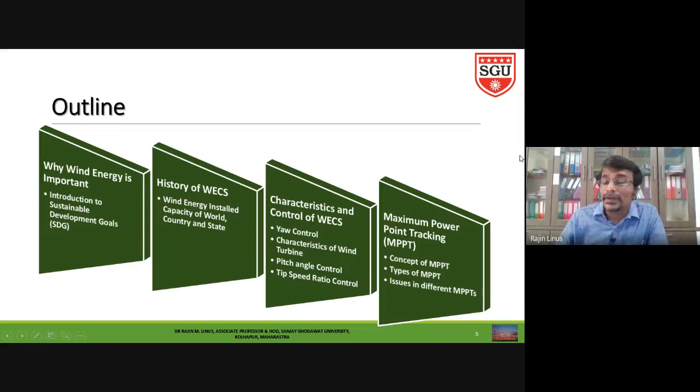So what is the concept of maximum power point tracking? If you are not doing this maximum power point tracking, what is the problem? Why do we need to go for it, and the types of maximum power point tracking and issues in different MPPTs — this is the outline of today's seminar.

So first let me see why we need to go for wind energy, and why it is important. As per the United Nations General Assembly in the year 2015, they fixed 17 agendas to improve our 17 sustainable development goals, in order to improve our world to the next higher stage, with a target of 2030 to achieve them.

I don't want to cover all the development goals, but the 7th goal of sustainable development is to ensure access to affordable, reliable, sustainable and modern clean energy, and increase renewable energy in the global share market. Nowadays we usually use diesel engines and fossil fuels for generating power. By 2030, people are targeting to increase renewable energy in the global energy share market.

Then, access to affordable and reliable energy by 2030 — some people are still not getting electricity nowadays.

So we need to give some rural areas electricity. Then another target should be efficient energy, where the energy should be efficient and clean. Clean in the sense, we are concentrating on wind and solar energy, two of the renewable energy sources.

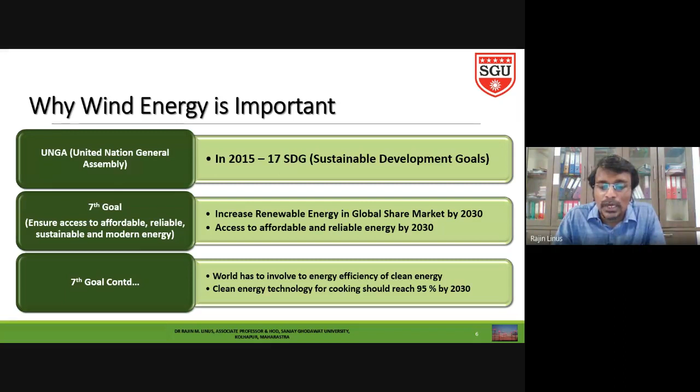So due to that, all the researchers are stepping towards implementing this, improving the efficiency of wind energy conversion systems, solar systems, and even electrical vehicles are part of these things. So based on that, more industries are thinking. As an electrical engineer or energy engineer, we can see there is some scope. So we should know what are all the development goals. That is why I have shown this for you.

Then, motivation towards renewable energy - we know why we need to go for renewable energy, right? So in 12th standard, we have studied ozone layer depletion. That is why heat energy is generated. You know this already, I am just revising it for better understanding of the forthcoming slides.

So we know the sun radiates energy. In that radiated energy, there are harmful UV rays, more harmful UV rays. If it comes directly to earth, what will happen? Skin diseases and other illnesses will happen to people - it is not good for health. So it is higher temperature, harmful UV rays. That is why, by God's grace, there is an ozone layer. Nature has given us this ozone layer for prevention, and the remaining filtered energy is given to our earth. So this is the normal case.

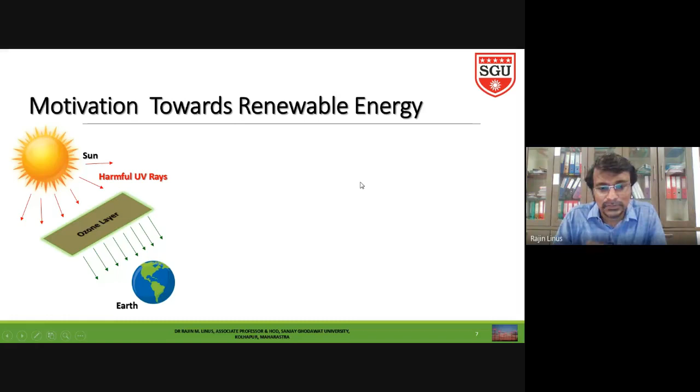So sun, ozone layer, and earth. Now the main reason for depletion is - we know chlorofluorocarbon.

Some electrical applications are generating chlorofluorocarbon. It will generate depletion or holes in the ozone layer. Then volcanic eruptions in some hills having metallic content will generate fire - this volcanic eruption also causes ozone depletion. This is natural, but as people change and technology improves, we are changing everything in the environment. That is why nature is against us.

Then the third one is higher pollution from vehicles and industries. This is another motto behind this. These are the main reasons for the depletions in our ozone layer.

So what are the effects of ozone layer depletion? I already told you, UV rays health problems will affect our health. Then life cycles of some species get affected, so we can see some species becoming rare - we cannot see them nowadays. The main reason is due to holes in the ozone layer, more UV rays are coming, causing this.

Then plants can get affected too. Then the last one is it leads to global warming.

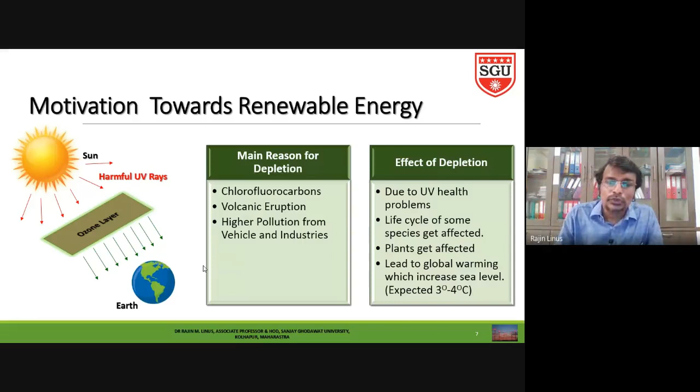So you should know this. Anyway, you already know this I think, just so you should know.

Then, world cumulative installed capacity of wind turbines. Coming 2023, people are expecting 903 gigawatts as the total world installation capacity in the form of wind. Our current status in 2019-20, installed capacity was 656, where 65 new turbines have been installed further.

So likewise, previous histories are not available. From 2015: 64, 55, 53 - there is a blue color small box showing new installation in gigawatts. So you can see this much installation capacity has increased.

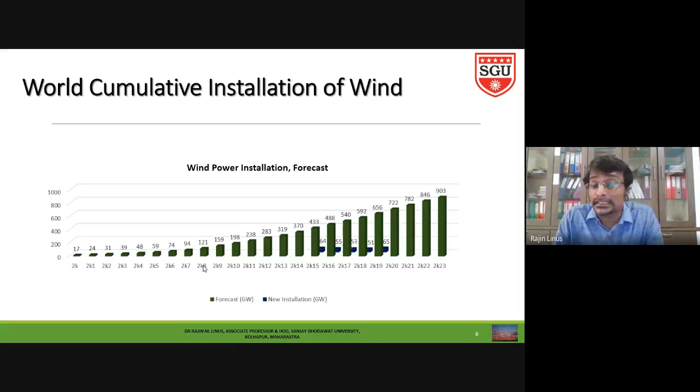Therefore, surely electrical engineers also have a good scope in this area.

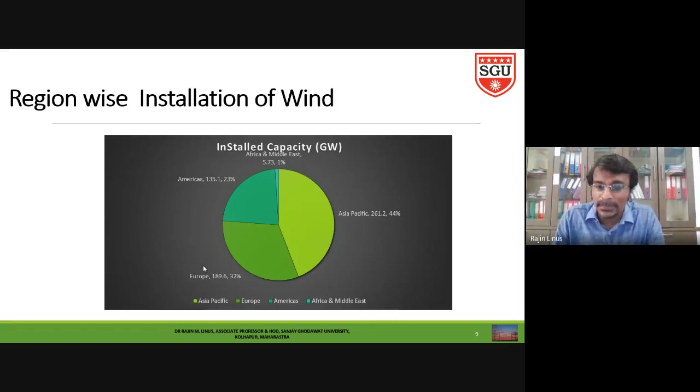Region wise, Asia Pacific has total installed capacity of 261 gigawatts, which is 44 percentage of whole installed capacity in this region. Second is Europe, 189 gigawatts, 32 percentage. America, 135 gigawatts, 23 percentage. Africa and Middle East have less, 5.73 gigawatts and 1%. So this is the region wise installed capacity of wind.

Then country wise, we should know China is first, with 211.3 gigawatts, 36% of entire installed capacity. Next is United States, 96 gigawatts, 16%. Then Germany, then India with 35 gigawatts and 6%. Likewise, Italy and rest of the world have 91.79 gigawatts, 15% installed capacity of wind. So this is the country wise data.

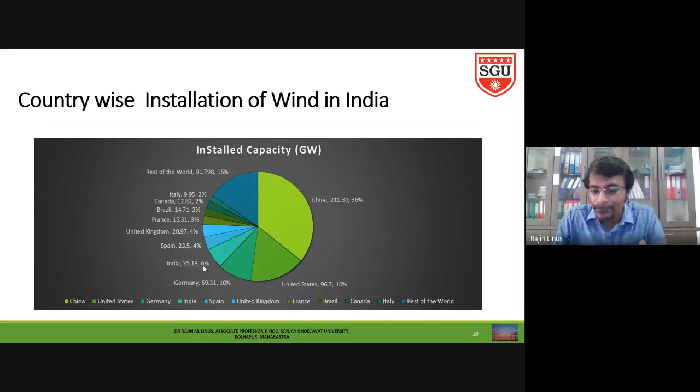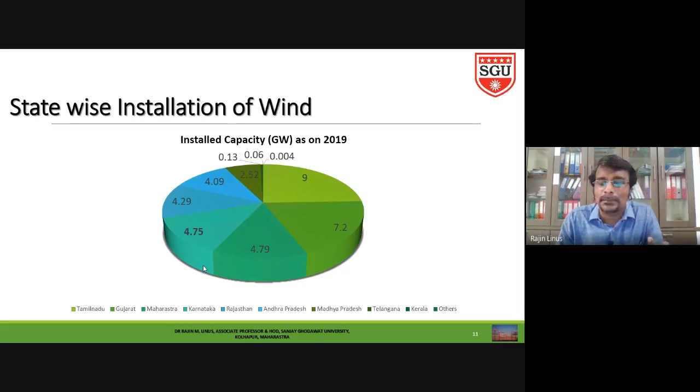We know that due to changes in the wind, the places are different, and due to that, wind flow is different. I have not included that topic here, as I need to concentrate more on maximum power point tracking. I included it in the previous webinar, so I hope you know how the wind flows. Based on that, the installed capacity everything changes region wise. One should know this entire thing to understand how, as electrical engineers, we have scope. This is one of the scopes. Like that, we can think about solar, electrical vehicles and other things.

Then types of control. I am directly entering into the topic of types of control, and I will go to maximum power point tracking. So kindly listen very carefully. It is very interesting, and if you listen, it is very easy to understand.

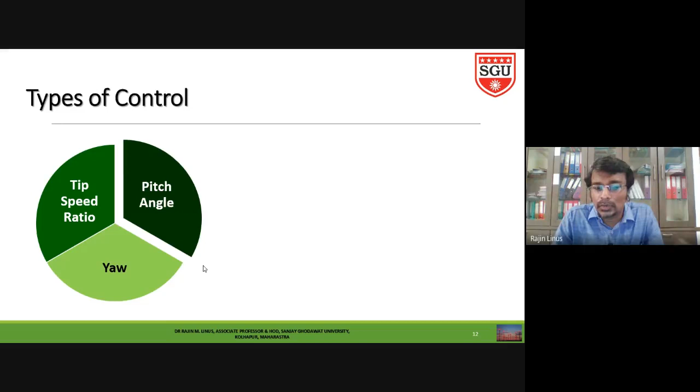So we have three types of control: yaw control, pitch angle control, and tip speed ratio control. First you should know yaw control. What is meant by yaw control? In this yaw control, the electrical engineer will not do much.

Yaw control means, like our pedestal fan, if we want the air in a particular direction, we turn the head of the pedestal fan. Like that, wherever the wind direction is, accordingly we change the head of the wind turbine. The wind has to attack directly and perpendicular to the wind blade. Then only the wind turbine will start to rotate. So based on the wind direction, usually we have two types of wind turbine: horizontal axis and vertical axis wind turbine.

I am not going to explain anything about vertical axis wind turbine. This is the wind turbine normally which you can see in Tamil Nadu state, like in Pollachi and Aralvaimozhi — that is horizontal axis wind turbine. So based on the wind direction, there is a wind vane and an anemometer. Based on the wind direction, we change the wind turbine head automatically. That is called yaw control.

Electrical engineers can't do much with that directly, but maybe we can think differently. I cannot say electrical engineers cannot do it — in this yaw control, there are servo motors for controlling and changing the direction of the head, so one can think of it. Then pitch angle control: based on wind power, power production and wind speed, I will let you know how pitch angle control is done. Then finally, tip speed ratio control — most of the MPPT I am explaining is in tip speed ratio control only.

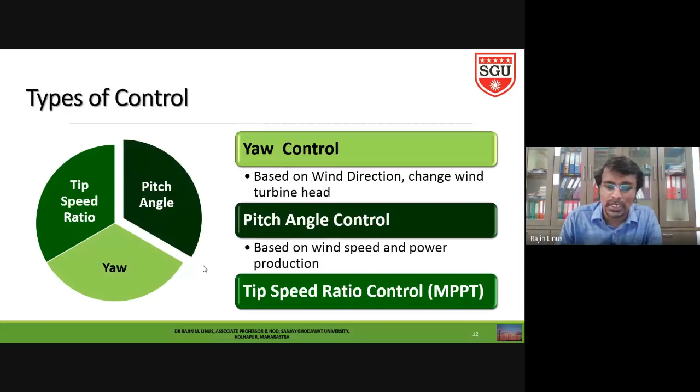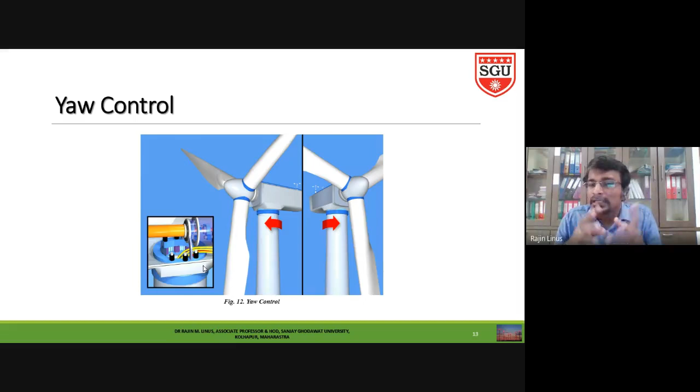Now for yaw control, see the direction of the turbine — left to right, shown by the red arrow. So the head can be controlled on both sides. We can see there a small toy-like device, which is the wind vane and anemometer, giving the direction of wind flow. Accordingly, in the shaft below the head, you can see one blue ring, and inside that we can see a servo motor. This servo motor works because the anemometer provides instruction to the controller, so the servo motor starts to rotate automatically, and the head will change.

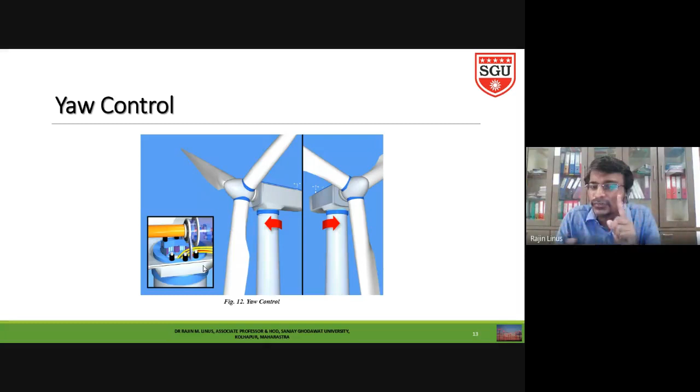So this is called yaw control. Then we should know pitch angle control. Pitch angle control is nothing but each blade can be rotatable. Each blade can be rotatable.

So why we need to go for pitch angle control? Please listen very carefully, it is important. Pitch angle control direction, each blade can be changed. Why we need to change each blade? That is very important, so I will let you know.

If you take one photo, front view of wind turbine, normally it will be like a flat, the blades are flat, wings are very flat. Assume that your direction of seeing the monitor, where you are now listening the webinar, is the direction of wind flow. Your eye direction is your direction of wind flow. Then the wind is directly opposing, it is a plane. So what will happen? All the wind will hit there. Due to that, what happened? This wind turbine will start to rotate. So this position is called pitch angle 0 degree.

So we cannot change, now all the wind is flowing. Wind is hitting this blade so that it is rotating. It seems to be like a plate, normal plane. So that is called pitch angle, pitch angle 0 degree. Now see this wind turbine position, it is tilted, it seems to be like one paper. Your monitor, you are directly seeing that is the wind flow direction, and you are looking at the monitor, that is a plane. That is called pitch angle 0.

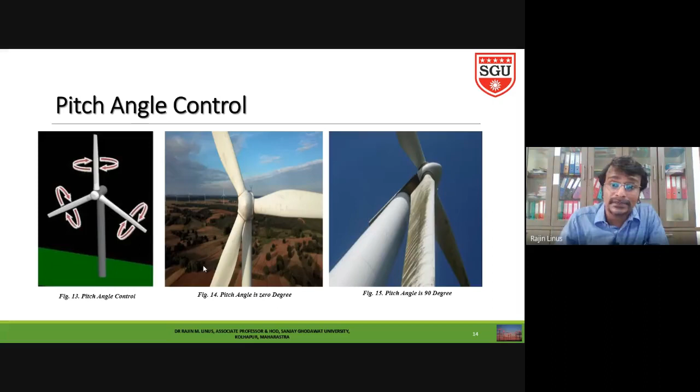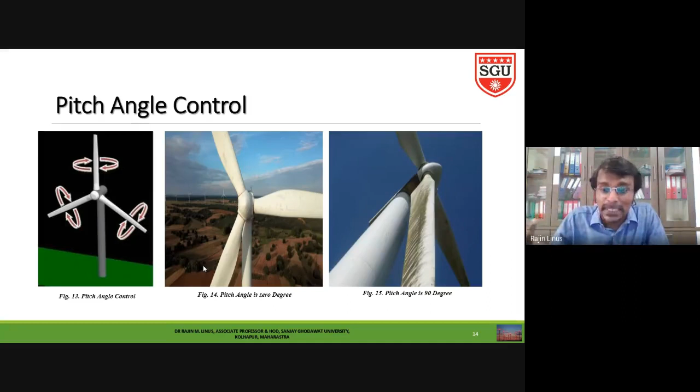So again, V cut-in speed is 2 to 3.5 meters per second, V rated speed is 12 to 13 meters per second, and V cutout speed is 25 meters per second. Beyond 25 meters per second, the wind turbine has to halt, otherwise the 3 blades will be damaged and we cannot run the wind turbine. That is called pitch angle.

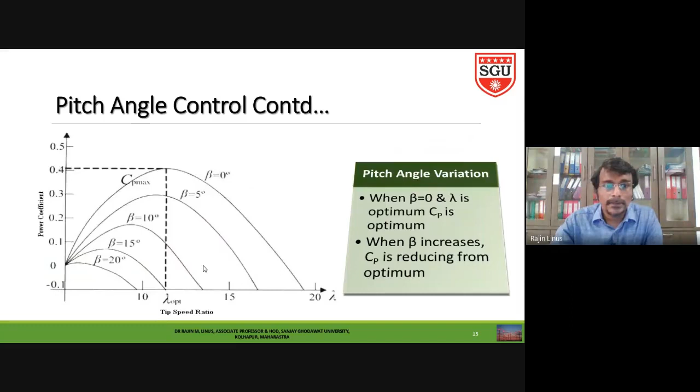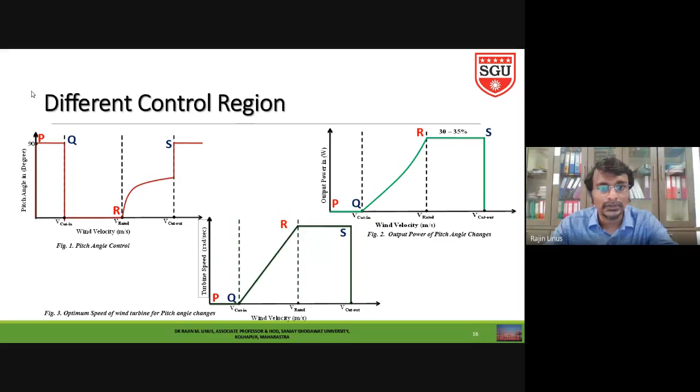Okay, moving to the next slide. In the last session, I told you about the different regions. Please try to understand maximum power point tracking. I am not going to explain the pitch angle control region now. MPPT I am only going to explain in the region Q to R, meaning between V cut-in speed and V rated speed. Don't confuse this with the region between P to Q and R to S and above that, only the region Q to R. We can see when wind velocity increases, output power increases, and turbine speed also increases. How this happens is what I am going to explain through maximum power point tracking. So once again, only cut-in speed to rated speed.

For the cut-in speed to rated speed region, the characteristics of the wind turbine look like this: generator or turbine speed on the x-axis, output power on the y-axis. For a particular wind velocity V1, the turbine characteristic looks like a hill. If wind velocity V2 increases, the power curve increases, the hill shape grows. Then V3, the hill shape increases again. Then V4, and so on. This wind velocity range V1 to V4 varies between V cut-in and V rated, not between 0 and V cut-in, or above V rated. This is the wind turbine characteristics.

I need to go into a bit of mathematics, otherwise it is very difficult to explain. The power characteristics of a wind turbine depend on parameters: air density, swept area A, and CP, the power coefficient. CP is a function of lambda and beta. Lambda is the tip speed ratio, beta is the pitch angle. Then wind velocity cubed. To repeat, power production from the wind turbine is half times rho, where rho is the air density, A is the swept area, which is a circle, pi r squared. Cp is a function of lambda and beta, I am not explaining more derivation about that, just understand Cp is a function of lambda and beta, then V cubed. Usually air density is normally 1.2 kilograms per meter cubed.

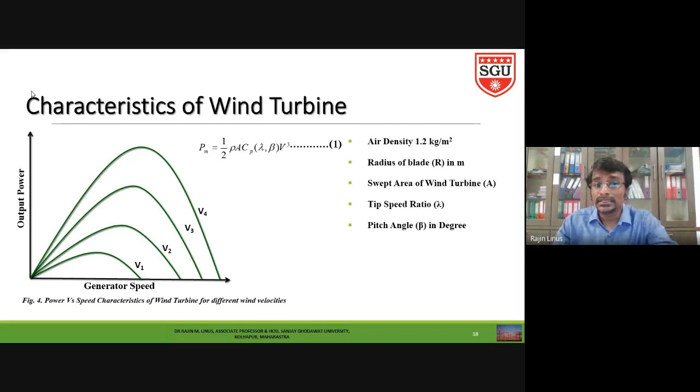Then power is dependent on the wind velocity. It is not in our control. As the wind velocity changes, our power will be changed. It is not our control. So power control is only the variation of Cp of lambda comma beta.

I have told you Cp is the function of lambda comma beta. We are assuming that MPPT operates between V cut-in to V rated. So what is the pitch angle between V cut-in to V rated? Pitch angle will be 0. So if that is the case, Cp is only the function of lambda, since beta is already fixed as optimum 0.

So Cp is only a function of lambda. What is lambda? Tip speed ratio. It is equal to speed into radius divided by wind velocity. So here, if the wind velocity is constant, the radius is also always constant. So lambda is directly proportional to generator speed.

So please understand, with this relation, beta is already 0, pitch angle 0, so Cp is only a function of lambda now. How will we change lambda? Only by changing the generator speed. So once the generator speed is optimum, automatically lambda will be optimum. If lambda is optimum, automatically Cp will be optimum. So this is the way of doing this.

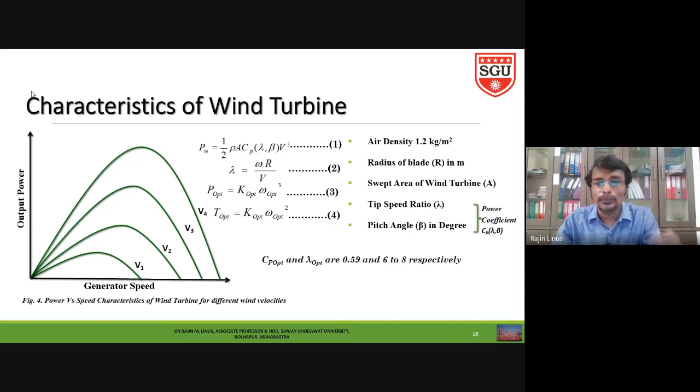So I hope you understood, this is interesting. This is the case. Now let's introduce these things, assume a little bit.

X-axis generator speed, why do we need to go for MPPT? Assume x-axis is generator speed, y-axis is output power. So now assume we are not at all using MPPT. What will happen? At any speed, assume the power speed is omega A, it will run at one particular speed. So at this speed, maybe omega A or omega B, we don't know which speed it will rotate. When its speed is like this, in this curve for a particular wind velocity, we will get this PA or PB.

If you are not using MPPT properly, we don't know where the generator speed will be. Based on the wind velocity, the generator speed will go somewhere, automatically to omega A, giving power PA. But for omega B, PB, we don't know where it is. I have just chosen these 2 points as examples.

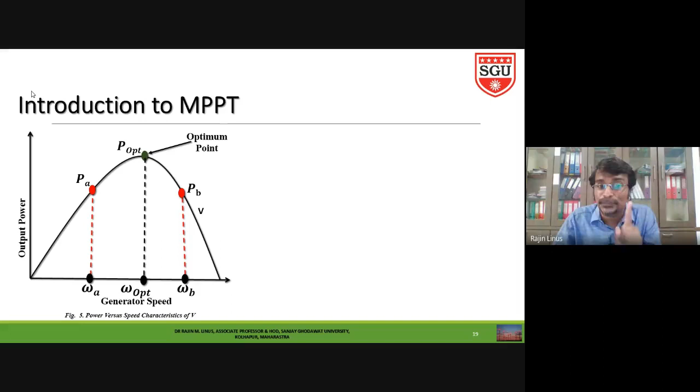But in our case, we have an exact maximum optimum point in the middle, the top of the hill. That is called omega optimum. Usually, when people install a wind turbine, it is designed to last 25 years, so owners try to recover their money before that. So instead of letting the generator run at some random speed, if we run it at the maximum optimum point speed, we extract more power, and over the entire 25-year period we get maximum energy.

Otherwise, our power will be there, but energy will not be there. Do you know what energy is? It is the integration of power with respect to time. So one should control the wind turbine at the optimum speed.

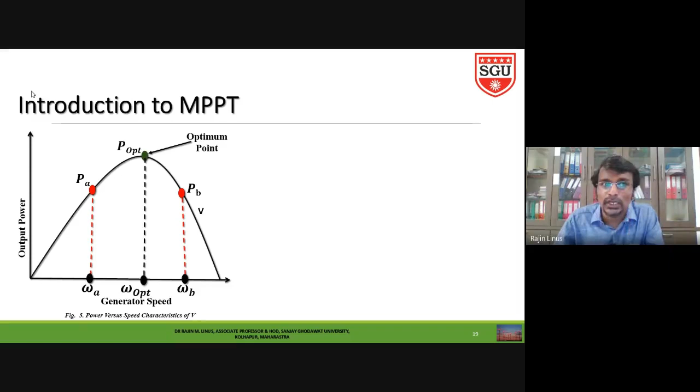So in order to control the optimum speed, people have introduced wind energy conversion maximum power point tracking. This is for one wind velocity V shown in figure 5. For various increasing wind velocities V1, V2, V3, V4, we get the optimum power curve, a parabola: P optimum equal to K optimum into omega optimum cube.

For particular V1, the optimum speed is omega optimum 1. For wind velocity V2, omega optimum 2, and so on till wind velocity V4. I hope this is clear as the optimum curve. So now we are controlling the wind turbine for various wind velocities between V1 to V4 through the region of the optimum curve. That is called maximum power point tracking.

Now if you see the torque versus speed characteristics, previously power is equal to K optimum into omega optimum cube. Torque versus speed is similar, but in this case the maximum torque is not the optimum torque. Please try to understand this. Maximum torque is here; in the previous case, maximum torque, power, and optimum power are the same. Optimum power and maximum power are same.

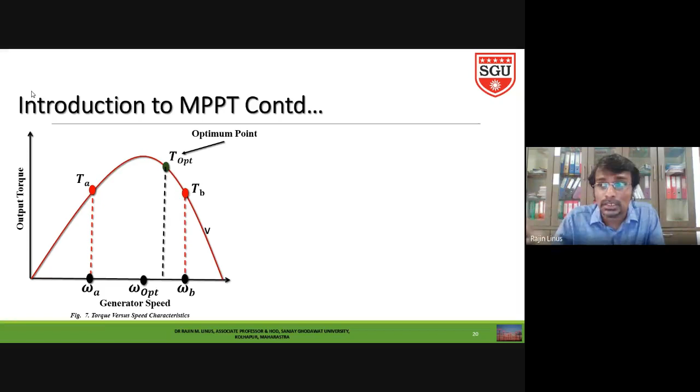At the same time, when we go through torque versus speed characteristics, I made a small mistake - this omega optimum should align with T optimum. T optimum is not the maximum torque, please don't confuse it. Why shouldn't this arrow mark be in the middle? It is optimum torque, not optimum power. So based on that, for various wind velocities, the torque versus speed characteristic is torque optimum equal to K optimum into omega optimum square.

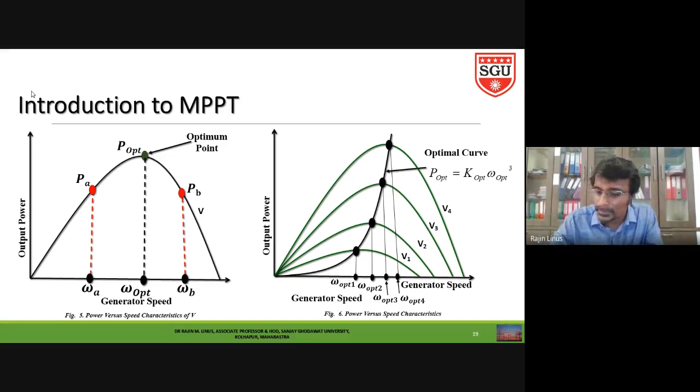So we have to run accordingly. If you want to make the generator run based on the power versus speed relation, you use that relation to make the generator rotate at omega optimum 1, omega optimum 2, omega optimum 3, and omega optimum 4. If you want to control the torque of the generator, use the method torque optimum equal to K optimum into omega optimum square, controlling speed accordingly for various wind velocities V1 to V4. I think if I go to the next slide, you will get it clearer.

So now, how will we control the torque? For example, if we use a separately excited generator for the wind turbine, we can control the armature current automatically and thereby control the torque. If we use an induction motor instead, controlling the stator current automatically controls the torque. Like that, we can indirectly control it, and in these cases we can control the torque and get the output.

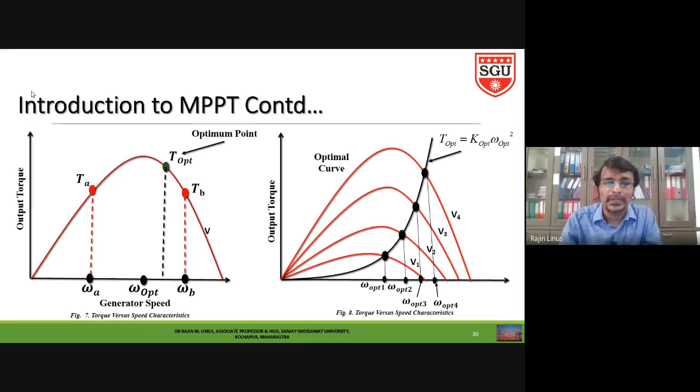Now, types of MPPT. MPPT is classified as... I think I need to take a little more time, otherwise I cannot complete it. I hope I can complete it.

Sir, can I take a little more time? Anyone can reply? Hello? Hello? Rajat sir, okay sir, proceed.

Yes sir. So in this case, we have different types of MPPT: lookup table method, state space model method, and neural network. I am not going to explain everything in this short span of time; it is very difficult to confine it to 1 hour. The lookup table method is classified as power signal feedback, torque signal feedback, tip speed ratio control, then state space and all, then hill climb searching algorithm. Hill climb searching algorithm can be classified as large step, small step, variable step, and sensorless control. If I explain everything at a time, you will be confused.

So everyone will be mad. I will go in another way, and I am not going to explain anything about the converter. It will take more time.

So in this lookup table, by using power signal feedback, see this is the wind turbine. Wind turbine output is given through the power converter to the load. This is normal, maybe grid connected system or standalone system.

Now I am explaining this using a standalone system power converter. So generator speed, the wind turbine generator speed, is the feedback. We are getting the feedback.

So now we have already seen the curve. What is the curve? Power, optimum power versus speed curve. That means optimum power equals K optimum into omega optimum cube. So this is one lookup table, the green color, where all the optimum power for various speeds is already stored. Once it is there, we are changing the speed as the input to the lookup table. The lookup table will provide the optimum power.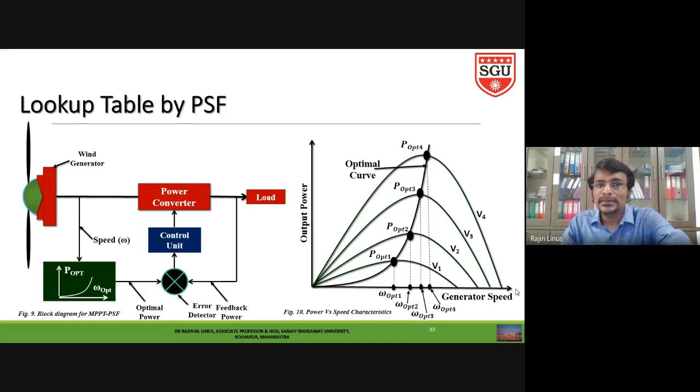So the same thing is for power signal feedback. Then the second one is torque signal feedback, using the second curve: torque versus speed characteristics. This lookup table is already inbuilt - the optimum torque versus speed curve. Speed is the input, output is the optimum torque. So torque feedback also we get from the generator.

See this, I hope you understand. Any difficulties, please interrupt me, no problem. I cannot see your chatting. This entirely is my screen.

So now, what will happen, we get the torque feedback. How can we get the torque feedback? Maybe by using armature current. We know, for example, we are using a DC generator - we are not using it now, but DC generator, how will we measure the torque? Torque equals KE phi into IA. So based on getting that generator current, automatically I can get the torque feedback that is given to the error detector. The error detector will provide the control output.

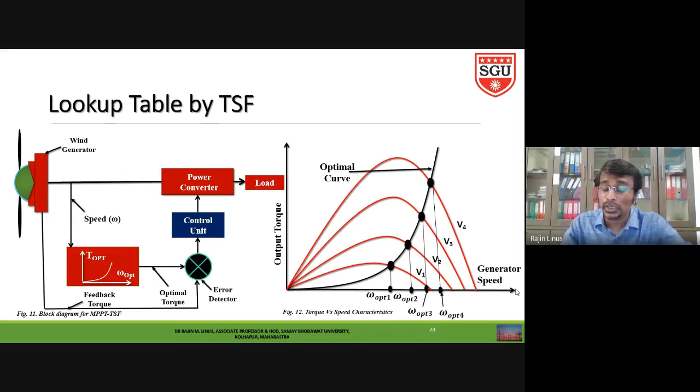Control output controls the power converter so that we can vary the power. So like that, one can use this lookup table method for torque signal feedback and power signal feedback. So the third lookup table method is tip speed ratio control.

So tip speed ratio control - this is the generator, then wind velocity is our input. We have to give wind velocity. This is power converter and load as like previous. So now wind velocity is our input. For this tip speed ratio control, we need an anemometer, which is an additional expense to the wind turbine.

Anemometer - this block will provide the formula for lambda. Lambda equals omega into R by V. Assume lambda is optimum, so what happens? It will provide the speed calculation: speed equals V into lambda optimum divided by R.

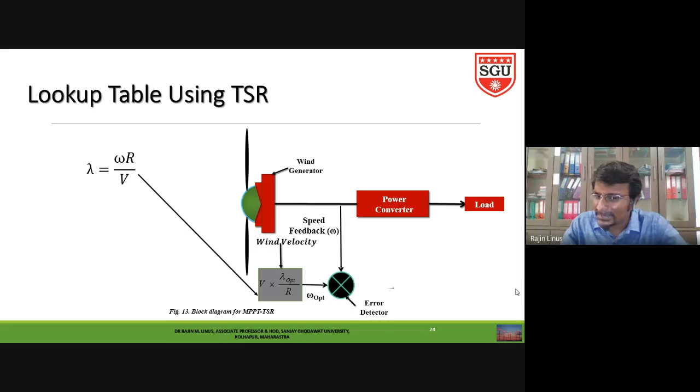So what is the value? Omega optimum - this is our omega optimum, which is given as feedback that we are also getting. We are giving it to the summing point and error detector, same as before. I don't want to say more.

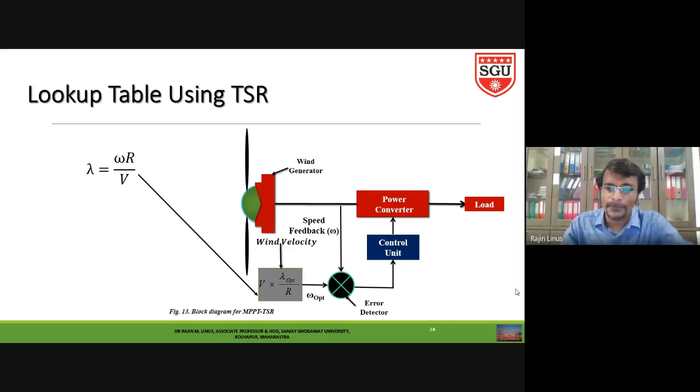So we are giving to controls unit and firing control circuit. This is the way of control called tip speed ratio control. In the previous case also it was tip speed ratio control, but we were indirectly controlling by using generator speed. In this case, we fix initially lambda as optimum, and from this we get the optimum speed. This is called the lookup table method. So this is just an analysis of PSF, TSF control, and tip speed ratio control.

In practical cases, turbine inertia is more, so the turbine will take some time to overcome it. Speed will change gradually, but wind velocity will change fast. By using the lookup table, we have to give an immediate response, but that is not possible in some cases, so energy production will be less.

We are storing optimum values in the lookup table, but in real cases, changes in air density happen, there is an aging factor, and non-constant efficiency of the generator and converter system. This makes the stored values in the lookup table inaccurate. As the wind turbine ages, air density changes day by day, sometimes with small changes, and power production changes accordingly. So the lookup table method is not much efficient.

It is efficient, but people are thinking, why can't we do online methods? That is why they introduced the hill climb searching method, and also tip speed ratio control, which gives a fast response. Once wind velocity is given and lambda is already fixed, we get the speed.

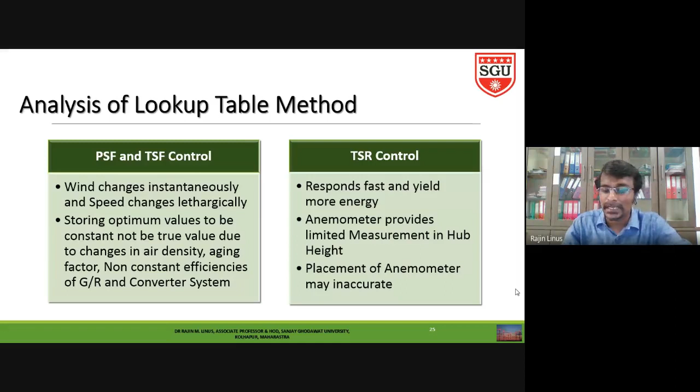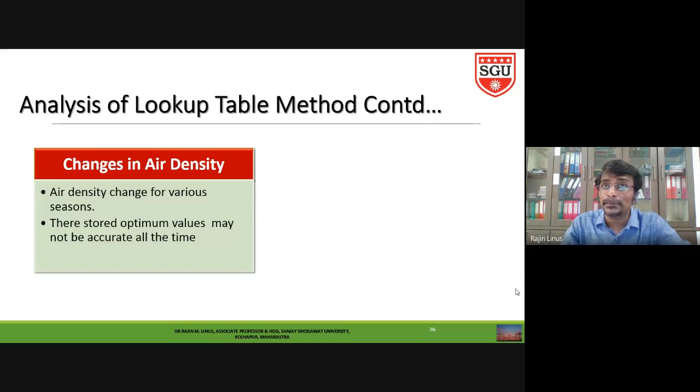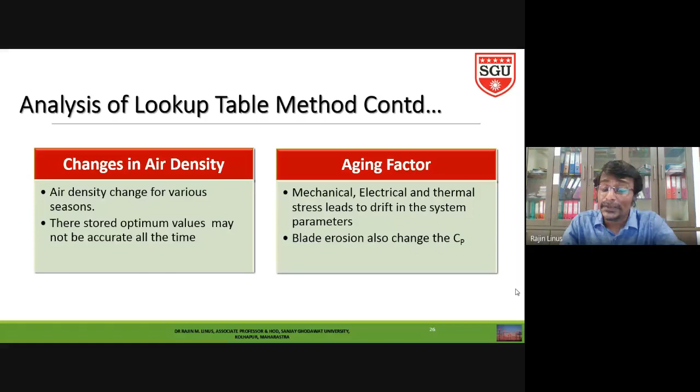Then another factor is changes in air density. Air density changes for many seasons, so people think the lookup table method, whatever is stored, is not always accurate—it will change. Then blade erosion and other things will change the CP value. Stresses in the mechanical, electrical, and thermal systems are also factors that reduce the efficiency of the lookup table method.

If I go further about the lookup table you may feel bored, so I am moving to the hill climb searching method. Hill climb searching is like climbing a hill—once you go a particular distance, you look up and see you haven't reached the top, so you move further. Eventually, once you reach the maximum, you can't see any higher point, so you assume you are standing at the top. That is called the hill climb searching algorithm.

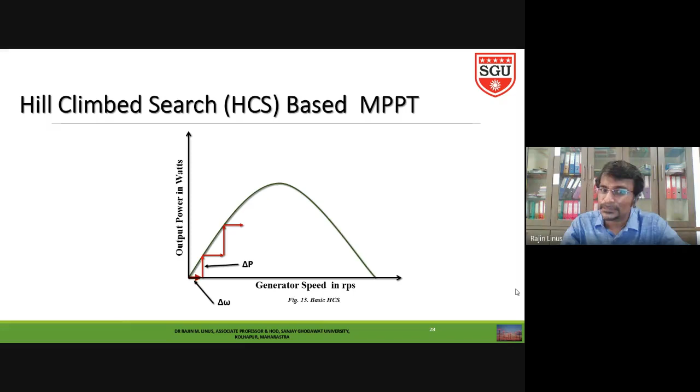Like that, till this maximum, it will go. So that is called the hill climb searching algorithm. Just gradually increasing the speed, we are reaching the maximum point. This is called the hill climb searching algorithm. I will go a little bit fast.

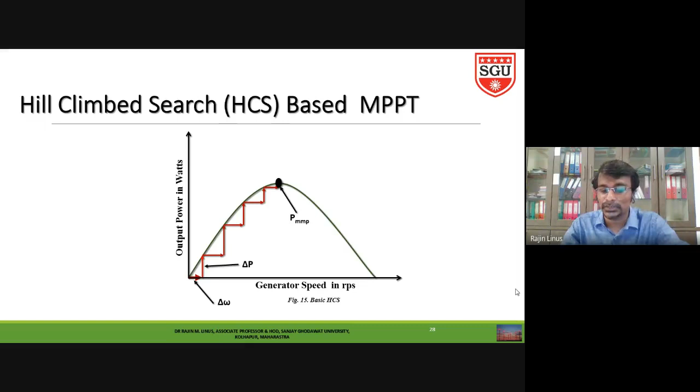I think you will get more interest. Hill climb searching algorithm has issues. Large step tracking: what will happen? Large step tracking means our tracking speed will be more. See, only 3 steps and we have reached the maximum point. At the same time, accuracy will be less, because we are moving beyond the optimum point. See the arrow after the red dot, we are going beyond that. That is called the optimum point. So we are going beyond that, and at the same time...

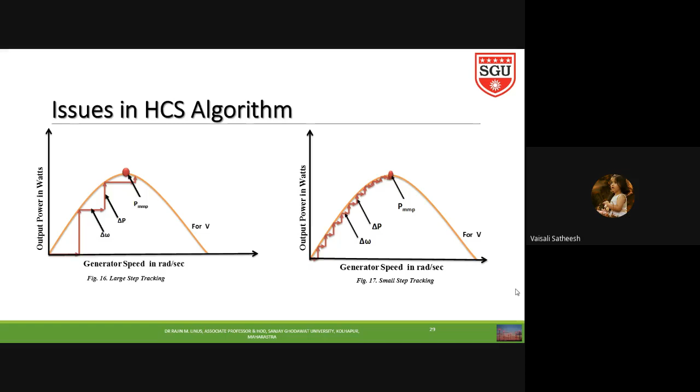Hello? Hello? What's up? Can I move further?

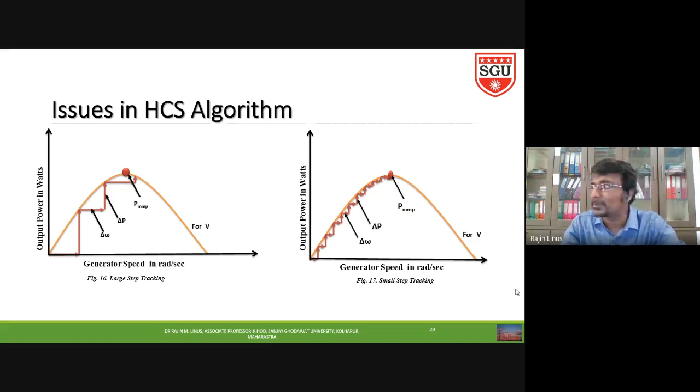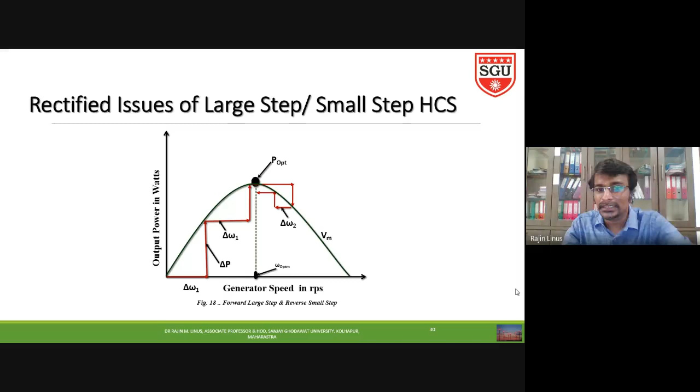So, generator speed and output power. Here, what happens: we use a small step. In the previous case, tracking speed is more, accuracy is less. In this case, tracking speed is less, accuracy is more. So this is the difference between large step and small step tracking. That is why people have introduced large step forward, then small step reverse tracking. By using small step reverse, people are tracking this optimum point. So these are all the different tracking methods.

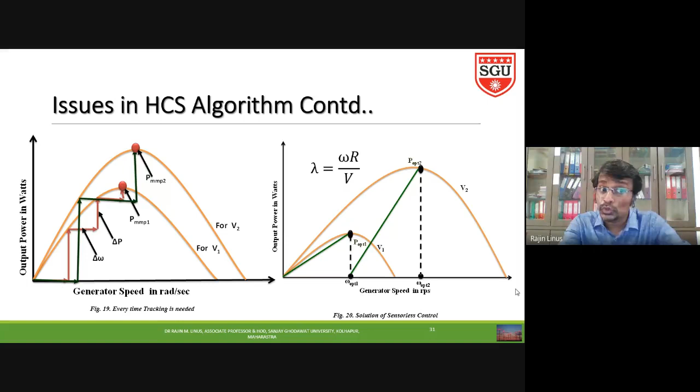So then the last issue is, assume that...

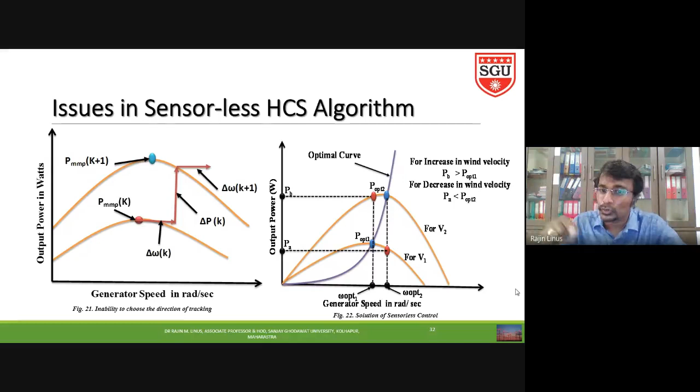So then hybrid hill climb searching algorithm: dp1 by rate of change of power with respect to speed, dp1 is higher than dp2 by d omega 2. As the operating point moves to the exact optimum point, that slope is reducing. So if the slope is more, the algorithm will provide more speed variation; if the slope is less, it will provide less speed variation. Like that, people are doing different algorithms.

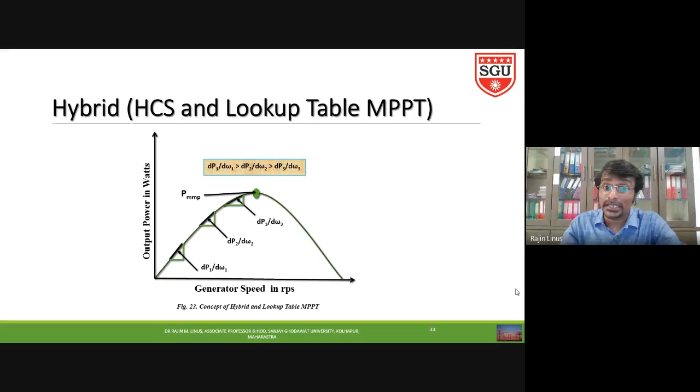This one is hybrid HCS and lookup table. Here, the lookup table already stores what is the optimum point. Then the algorithm will check whether the operating point is far away from the optimum point, so it will increase more speed, otherwise less speed. There are different hybrids like this, and more algorithms exist, so it is very difficult to cover all of them.

So the final two things: state space model based MPPT. Wind energy conversion systems are totally non-linear, so for state space representation models, people use sliding mode control and observer based models. In these models, more modeling and more model equations are needed. Due to that, the state space model will not be accurate when any changes occur, since the model is fixed. That is the disadvantage of state space model based MPPT.

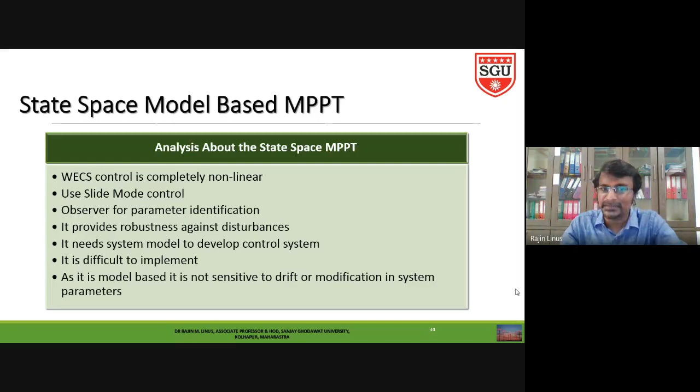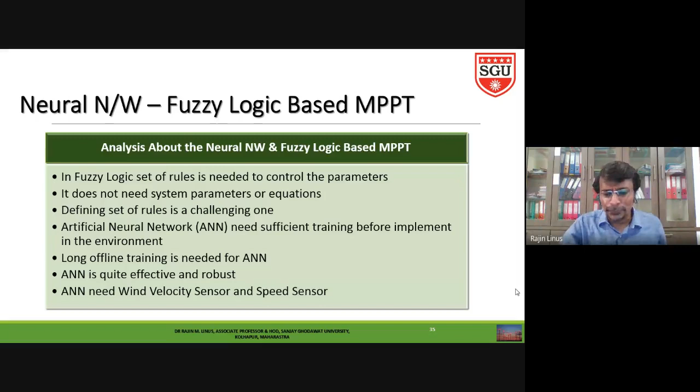So any doubt is there, you can ask me now.